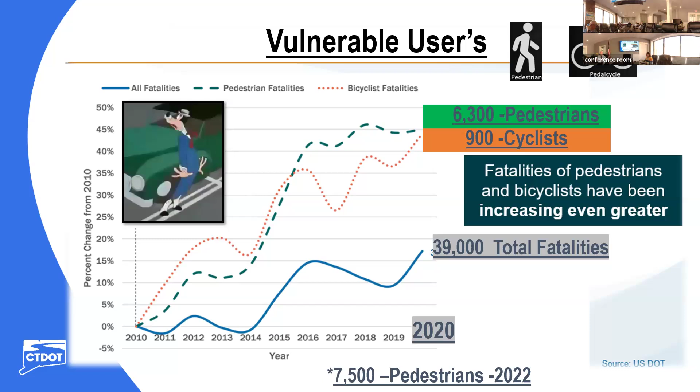6,300 pedestrians are killed annually, 900 cyclists, and in 2022 it was up to 7,500. The trend here is progressing significantly higher at a very fast pace, and the reason is speed. Speed is the reason we're having so many fatalities. In Connecticut, over 300 fatalities a year on our roadway systems, been averaging recently.

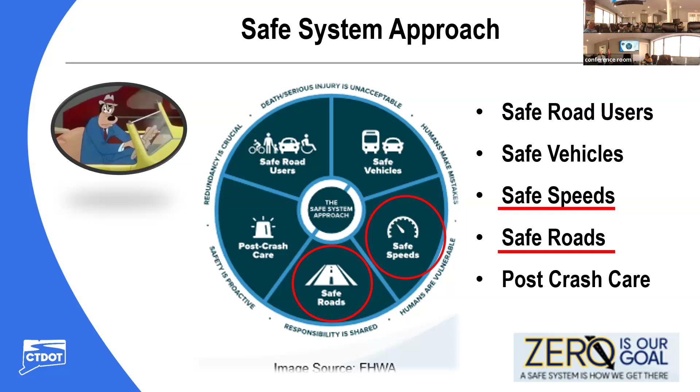Federal Highway has something called Safe System Approach. It's a 5-tiered wheel, and as transportation professionals, the ones that we focus on the most are safe speeds and safe roads. Those are the ones that we can have the most influence on. We can also look at safe road users through education, but we're primarily safe roads and safe speeds in that mission. And roundabouts are a tool to get us where we want to be. So we'll take a look at that.

But after about 3 months, the community understood the purpose of the roundabout, how it worked, and this really wasn't the trend anymore. But when it first opened, there was enough misunderstanding of how it worked that this was the attitude locally for a few days. And we saw that repeated in West Hartford recently.

So make sure that you educate your community, your team that you want to think about, your municipal leaders, especially emergency services. You cannot have a successful roundabout project if you don't have the police chief behind you and the fire chief. Very important. Public works for maintenance purposes, and your business owners. We don't always think of them as part of the team, but they're the ones that are working with the community. They engage the community the most. So if they're positive about some change in the community, they could spread that through their business interactions. Make sure you engage them.

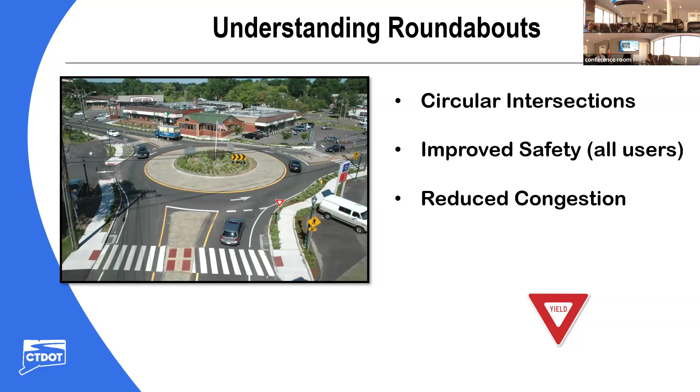Roundabouts are circular intersections that improve safety for all users. They reduce traffic congestion. Slower speeds, 15 to 25 miles an hour. There's no left turns at roundabouts, fewer decisions to make. You have less conflict points, less pollution. That's what makes them so good.

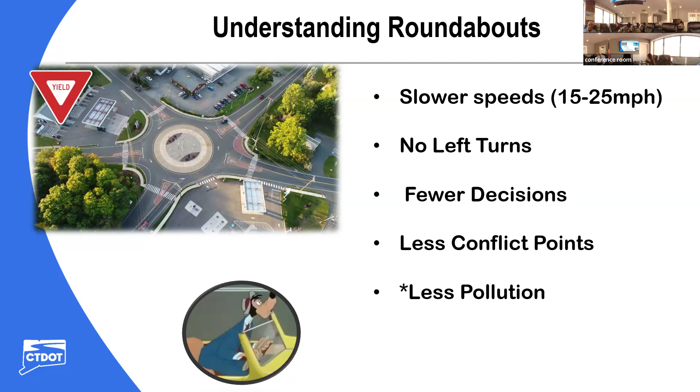When you compare roundabouts to traffic signals, signals tend to create more crashes. You have the signal going red, people are inattentive, they're not paying attention, you end up with rear end crashes. People get in a rush, they try to beat the light, maybe they make a left on red trying to clear the intersection, you end up with these angle crashes. And most of all, the signals don't address high speeds.

I have a lot of people from the community meetings that come to me and say, Scott, why don't you just put in a traffic light, it'll solve the problem. Well, the light is green and it doesn't address speed. So your pedestrians are still crossing at higher speeds. And if there is a crash, it happens at a higher speed. The signals also tend to be a lot less efficient in the off-peak hours because time is assigned around the intersection at certain phases. And it's very limited as to who can access the intersection at one time.

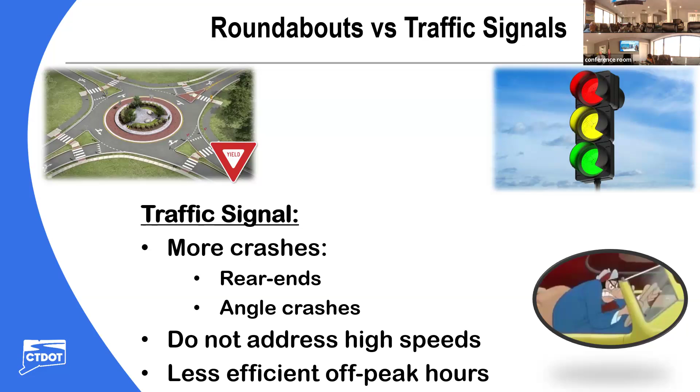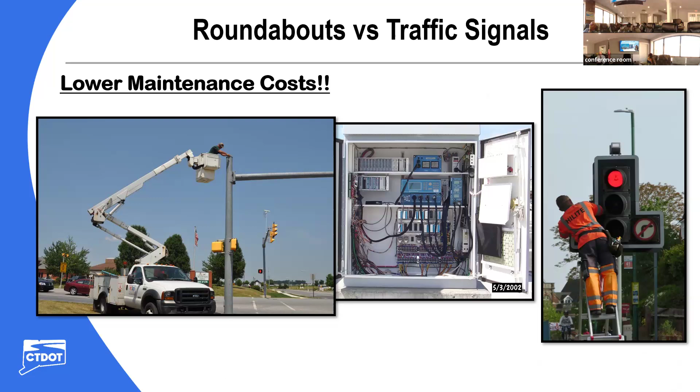When you start thinking about maintenance costs and we look at electrical systems and computer systems with signals, these have to be replaced every 15 to 25 years. These are an inherent maintenance liability that are very, very expensive that you don't have with a roundabout. So there's a lot of benefits to roundabouts.

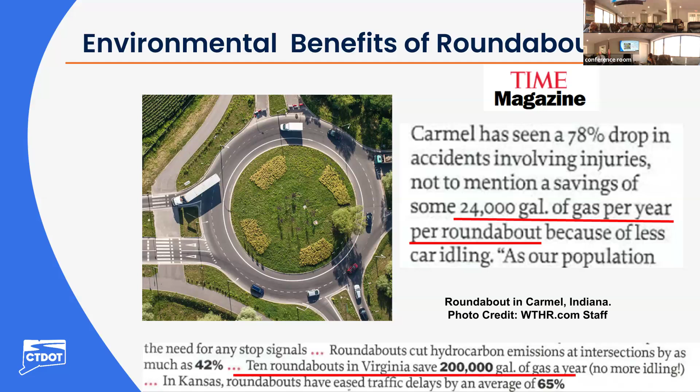When you look at the environment, 24,000 gallons of gasoline was saved in Indiana, and in Virginia, 10 roundabouts saved 200,000 gallons of gasoline in their community. So certainly a big environmental benefit from that. And in terms of operation too, and not having emissions from these vehicles, the roundabouts tend to be much, much more efficient, especially in the off-peak hours.

Now, the trend in roundabouts has been progressing significantly. They really got started in the US sometime around 2000. That's really when they first started coming out. Connecticut DOT got involved about 2005. We built our first roundabout maybe around 2007 or 8. But we've got over 10,000. I think it might be up to 11,000 now in the US. But the Northeast predominantly is where most of them are, except for California and Florida.

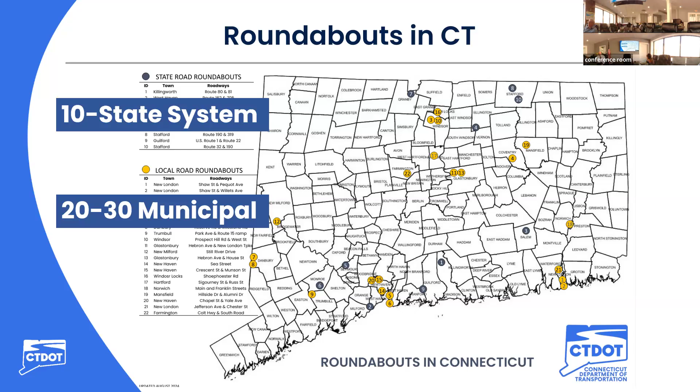We now have 10 on the state system. I'm estimating about 30 on the municipal roadways. This map is not 100% accurate because we don't have the best reporting system. It's really word of mouth, and if people let us know, we throw it on the map. I know there's one in Stamford that just opened that's not here. The one in Naugatuck is not here. And the one on the state system in Haddam we just finished last month needs to be added, but you get the general idea.

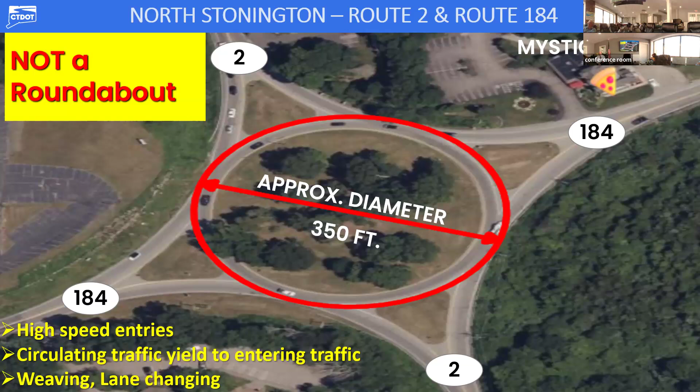So comparing roundabouts to old rotaries or traffic circles, this is not a roundabout. We have senior folks that refer to these as roundabouts from time to time, but this is not a roundabout. This is a traffic circle. And the difference is high-speed entries, and circulating traffic, when these were initially built, had the right of way, right? So circulating traffic would initially yield to entering traffic. That was subsequently changed. The yield was put on the approach due to crashes, but you get a lot of weaving, lane changes. The worst with these are the higher speeds.

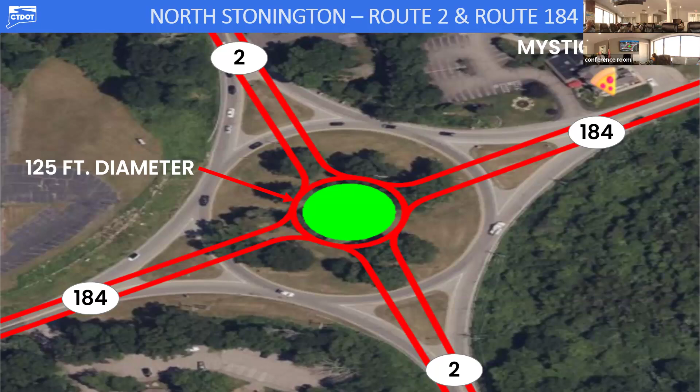This is what a modern roundabout would look like at that intersection. And this is in Connecticut. This is North Stonington on Route 2, still there, but if that was converted to a modern roundabout, that's what that would look like. And the speeds would be substantially slower for improved safety. Modern roundabout features, we have the truck apron, which is very important. That's what the rear wheels of the truck go up on.

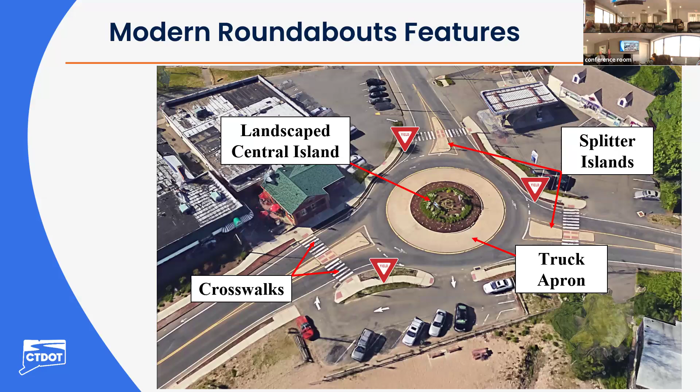We have splitter islands on the raised approach. We have crosswalks. We have yield signs. Very important features in a roundabout. In practice, you can see the truck apron here. That's what the rear wheels on a tractor trailer ride up on as they go around it. That allows us to keep the circular roadway narrow for motor vehicles.

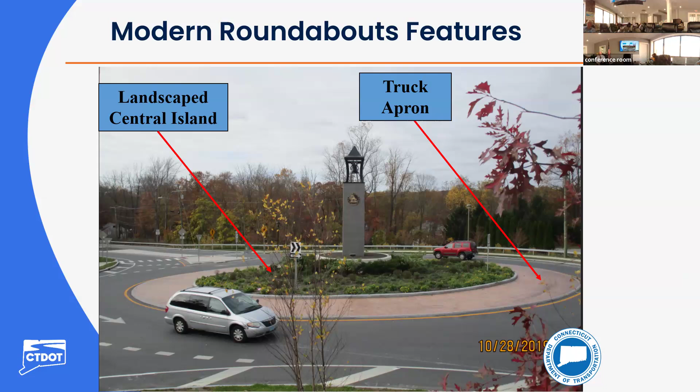The landscape island, you can see here, a lot of folks call that aesthetic, right? And plantings, but to me, that's safety. You can see that from a distance. You can see things with vertical objects from a distance, and that helps with the traffic calming. So I strongly recommend the landscape features.

Our design manual is NCHRP 1043. This is the third manual on roundabouts to come out in about 20 years. And the sense there is we're constantly learning, we're growing knowledge, we're progressing, especially when it comes to multi-lane roundabouts. So we try something and we learn from it, and then we revise the manual based on what we've learned. And that's going to continue for some time, especially in multi-lane roundabouts.

Now, some things to really look at if you're doing a roundabout review, maybe concept work, is alignments. This is one of the most critical roundabout design features in terms of overall safety. So if you have left aligned, that means the roadway coming into the roundabout is to the left of the center of the circle. And that gives you the best deflection, the best speed control coming in.

You can use center aligned, where the center of the roadway matches up with the center of the roundabout. Generally, it's a larger diameter roundabout. It requires more real estate because the diameter of the roundabout has to be bigger to get your overall deflection. What you absolutely don't want is right aligned. That means your approach roadway lines up with the right side of the roundabout, and you're going to have very, very high speeds. This is a fatal error in roundabout design.

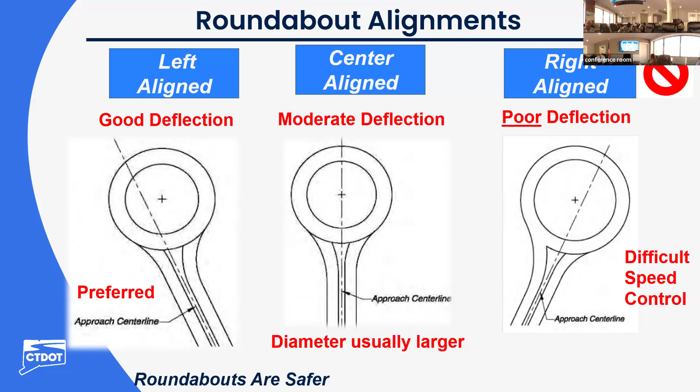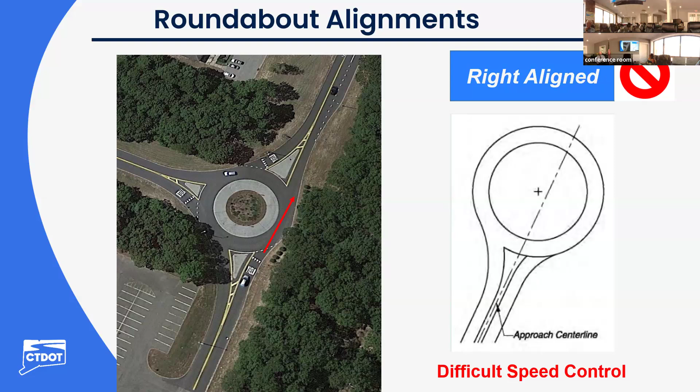And here's what that looks like in practice. So here's an example of that in practice. On paper, it may have not been noticed, but as that's built, we're going to get pretty high speeds through that intersection, right? So that's what's to be avoided. And I think it's pretty clear the goal that we're looking for here is speed control for safety. And we're just not going to achieve that with a right aligned roundabout.

Roundabouts have reduced conflict points over traffic signals or stop controlled intersections. Roundabouts have 8 conflict points because it's right in, right out. There's no left turns. When you look at a traffic signal or stop controlled intersection, there are 32 conflict points. Those are areas where you have vehicle path overlap. It's predominantly related to vehicles making left turns. Left turns from all these roadways cross other paths, and they're crossing in front of vehicles at extremely high speeds. And that's where your crashes become severe and you have injury crashes.

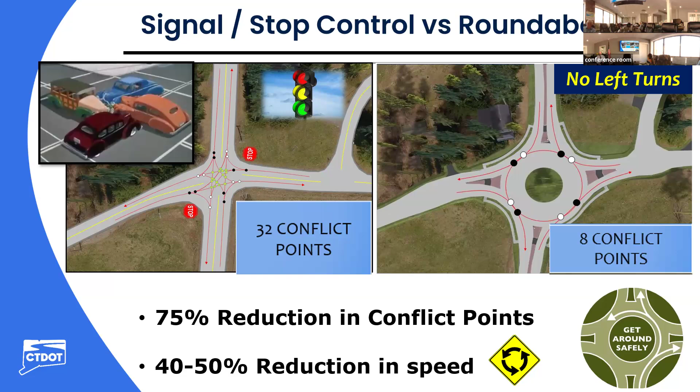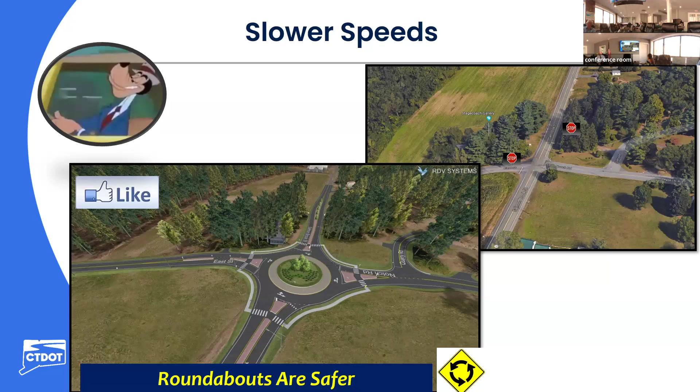So 75% reduction in going to a roundabout, often 40 to 50% reduction in speed can be achieved when you go to a roundabout. And looking at this example, this is in Granby, Connecticut. Looking at the roundabout compared to the conventional intersection, it's very clear which one's going to be safer just because of the geometry. You've got that high-speed rural arterial, likely speeds over 50 miles an hour on that. With the roundabout, you're going to be 15 to 25 miles an hour. And that's where we want our communities to be, safe.

Here's the speed reduction coming into the roundabout. This is my preference on design. It's a chicane type design, kind of forces a little bit of curvature on the approach to the roundabout. But if you look ahead, the driver's view of the roadway is cut off. It's cut off by the chicane and it's cut off by the central island of the roundabout. You don't have that appearance that the road just goes straight through. And that's what promotes traffic calming, gets people to slow down.

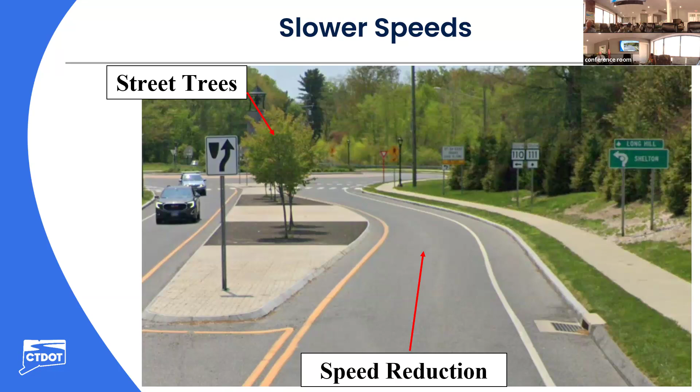I also like the street trees. I think they're an important safety component. It's not just aesthetic. That limits the visual corridor that the driver's looking in, and it tends to promote traffic calming. So love street trees.

Yield on entry. What's important here, double yield signs on the entry. Right and left yield signs. The one on the left is optional, per the MUTCD. Strongly recommend doubling up the yield signs. Works very well.

Landscaped islands and gateway opportunities, I strongly recommend them. I like flagpoles, municipal gateway signing, tall landscaping, not large caliber trees, but tall landscaping, especially because of its visual strength. People see that from a distance as they're approaching the intersection, and they slow down.

That's something that gives us the traffic calming that we're looking for, reduce speeds. But something very critical in this as a design feature, not an aesthetic feature: whatever you put in the central island, take the time and the expense to put lighting on it. Ground mounted up lighting is what you want.

Now, the conventional intersection, as you're approaching, if there's a traffic signal, you're going to see the signal, red, yellow, green. You'll see that at nighttime. Roundabouts are dark. You don't have the signal heads. So give that driver something to show them that the roundabout's ahead. And by illuminating your landscaping, by illuminating your municipal gateway signs, they can see that. And it's very helpful. Let me go back one slide. Okay.

One of our first roundabouts in Connecticut, this was Killingworth, 80/81. This was a retrofit. So this was an old traffic circle, kind of the low-hanging fruit, low expense, very high speeds through here. You're probably getting 40, 45 miles an hour. So we did a retrofit on that with moderate roundabout features. We get speeds down maybe 20, 25 miles an hour. That was a big success in terms of safety and operation.

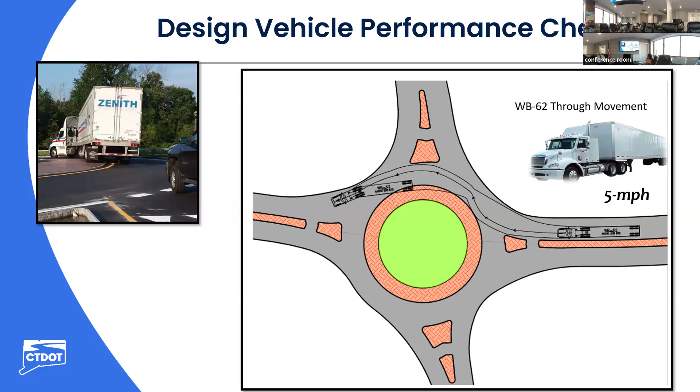And this is how we design for that truck. We use AutoTURN performance software with our CAD. And if you look at this, you can see the rear wheels of the truck are on the apron. The cab of the truck is on the circular roadway, lines up with that picture to the left. That's how that works. Cab of the truck never goes on this truck apron. That's a poor design right there. Cab of the truck should be designed to go on the circular roadway. Only freight goes on the truck apron, never passengers.

And here's how that looks in practice. You've got that tractor trailer going around, the rear wheels are on the truck apron, the cab of the truck is on the circular roadway, exactly how it should be.

And this is what happens, folks, if you don't properly design for that vehicle, right? The failure to the left side of the picture, we cheated the buffer. We didn't have a lot of space. It was a downtown commercial area. We went with a 2-foot buffer instead of, we typically do 4 feet between the curb and the sidewalk. And we put the yield signs in there, and the mirrors on the truck overhang the curb.

So when that truck is going through that curvilinear geometry and the mirrors are overhanging the curb, the mirror's taking out the yield sign. So you really need a 4-foot buffer to do that properly. And then we cheated on the center island. We didn't really accommodate the 62 properly. This first one was designed for a WB50 prior to the 62 design vehicle becoming the state norm with a permit. But this is what happens, type of damage.

And my point in showing this slide is that a 6-inch curb is not a deterrent to a driver of a WB62. That's a bump for them. And if they get in there and they get hung up, they're probably not going to back up gently and try to get out of it. They drop a gear and hit the gas. And this is what's going to happen.

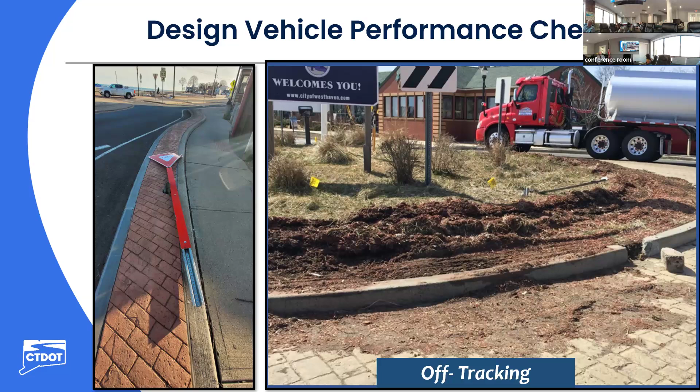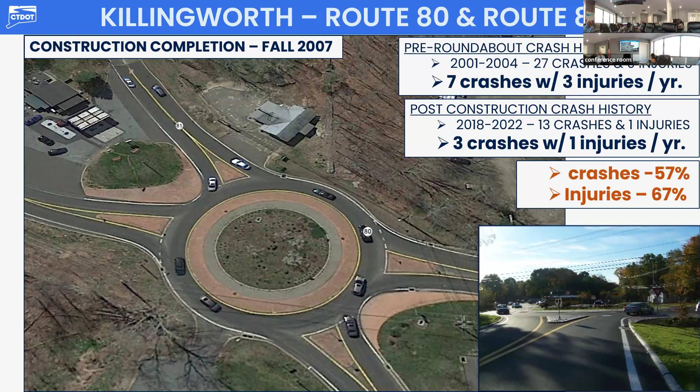Now, this location here came to me as a traffic signal request years ago. And we just knew for safety, because of the geometry there, fairly high speeds, the alignment of the intersection, the crosswalk especially concerned me with the length of crossing for our vulnerable users. The roundabout was the right choice here over a signal.

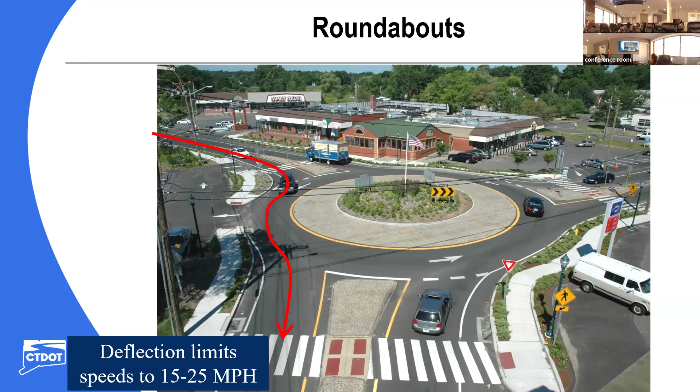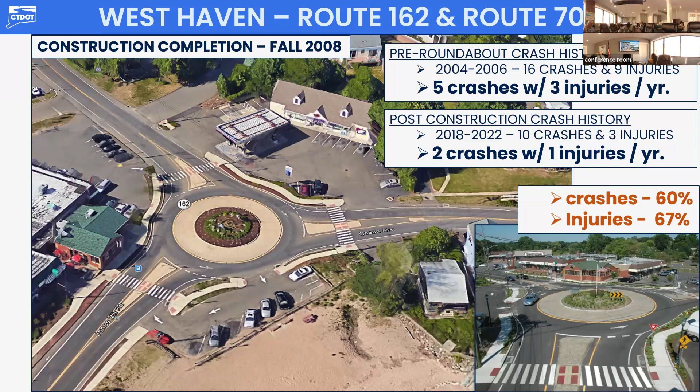We got deflection, we reduced speeds down to 15 to 25 miles an hour, and we got good pedestrian infrastructure. That's our goal. That's what we want. Significantly better choice than a traffic signal for that intersection. It works great. Reduced crashes, reduced injuries 67%. Good safety success with that one.

Now, when we think about our pedestrians in terms of safety, if you have a pedestrian get hit at speeds around 20 miles an hour, 9 out of 10 survive. Once you go into 40 miles an hour, those are our signalized intersections, a lot of them. Only 1 out of 10 pedestrians will survive a vehicle strike at 40 miles an hour. So we could save lives by implementing roundabouts and keeping that speed down in the 15 to 25 mile an hour range, especially.

Those are my preference. For cyclists, what I absolutely do not want to do is build a cycle track around the perimeter of the roundabout, because now you're putting bicycles in front of vehicles that are exiting to the right. And in the Netherlands, it's been a conflict. In other areas it's been tried. So either encourage people to ride with traffic in the circular roadway or exit the roadway onto a side path or a sidewalk.

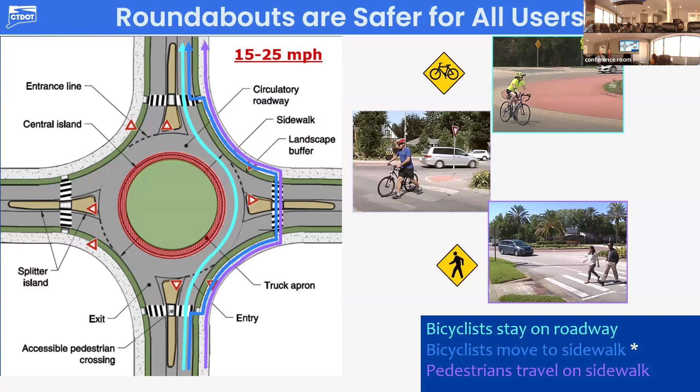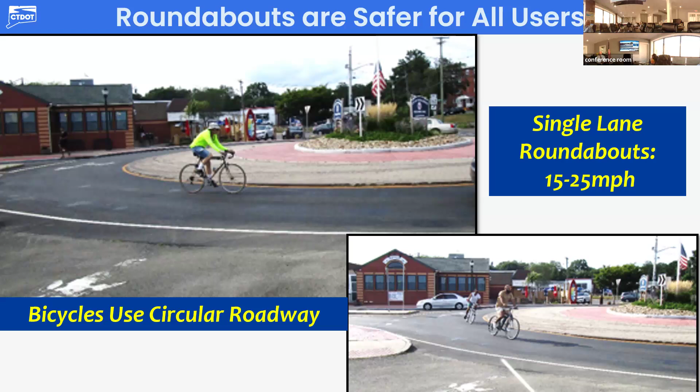Here's that cyclist. This is on our West Haven roundabout, riding with traffic, no problem. Very easily and safely get through that intersection. And what I like seeing about this is they're not riding in front of vehicles. They're never crossing in front of a vehicle entering the roundabout. They're not crossing in front of a vehicle exiting the roundabout. That's the safest place for a cyclist to be.

Now, another thing about roundabouts in terms of pedestrian safety that's very different than other intersections. At a conventional intersection, whether it's stop controlled or signal, the crosswalk is in front of the vehicle. It's in front of that operator that's making complex decisions. They're looking at the traffic light, trying to determine if it's green, can they go? They're looking at other vehicles approaching the stop sign. When is it my turn to go? There's a lot of data they're processing.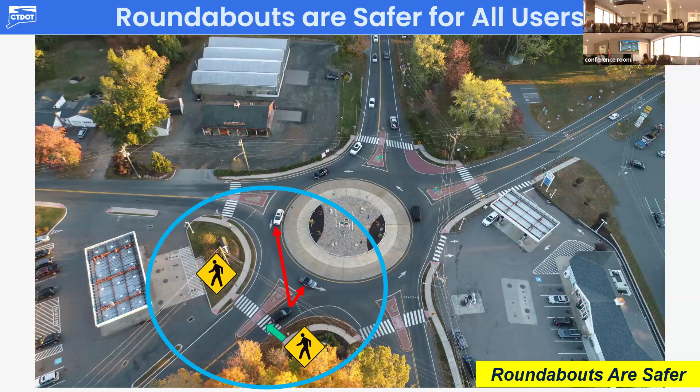What they're not doing is looking to their right to see if a pedestrian might step off the crosswalk at a point which they hit the gas and go. And you don't have those types of opportunities for conflict with a roundabout, because the pedestrian crossing is behind the lead vehicle. So that vehicle that's going to enter the roundabout, he's processing information, he's yielding to those vehicles on the circular roadway and he's getting ready to enter the roundabout. He's not concerned about pedestrians. The pedestrian's always behind the operators making the decision, making pedestrian safety at roundabouts substantially safer than any other type of intersection.

And here's how that works. You're crossing behind the lead vehicle making the decision. It's a two-stage crossing. You look to your left. If you got a gap, you go out to the refuge island. You look to your right. If you got a gap, you cross the rest of the way. These are short crossings. Always illuminate your pedestrian crossing.

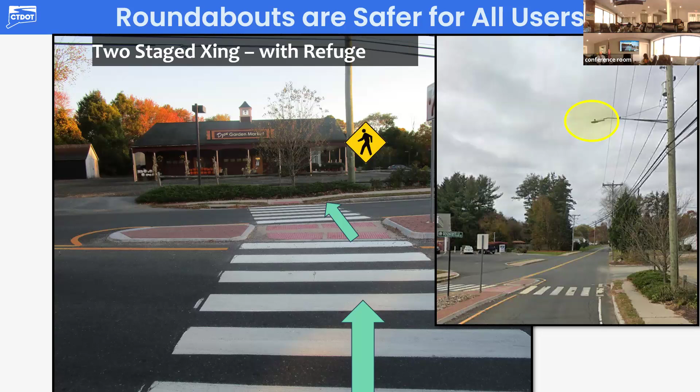To the right here, I have a picture of illumination. That's front lit. That means the light goes in front of the crosswalk. If you put it on the back of the crosswalk, it creates shadows. So always front light your pedestrian crossings, very critical. Illumination is a very, very important part of roundabout design. It has to be done. It's not an option. It must be done. You have to have good illumination.

Now, if there's one takeaway from today's talk that's the most important to me, it's sidewalks. Always build sidewalks at roundabouts. We never want to be in a situation where we said, oh, nobody walks up there. There's no destinations. There's no people walking. There's no pedestrians. At some point, there's going to be a pedestrian there, whether it's somebody jogging, somebody's car broke down, there's going to be a pedestrian.

In this case, I spent a lot of time in this location early on. In the early 2000s, there were no pedestrians, right? There were really no destinations. And then I went out there after we built the project. It was a half day of school, and I see kids walking to the convenience stores to get ice creams and sodas. Good. And there's no sidewalks. So if you look at that truck in the roundabout, where's the front bumper of that truck? It's almost overhanging the curb line.

Roundabouts don't have shoulders. So that painted line, it's a visual aid. It's a white edge line. It has the glass beads. It reflects at nighttime. It helps guide the driver. It's not a shoulder like a conventional intersection. It does not have a safe space for pedestrians.

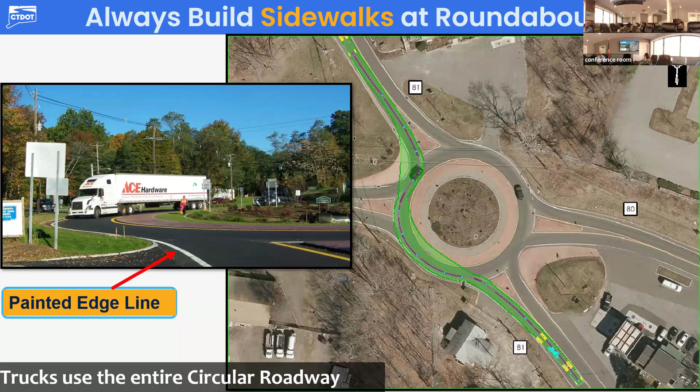So if any of us in the room or on the call were at this location and we were pedestrians and we're going to cross this intersection, where would we logically go? We're going to go to the truck apron and we're going to kind of skirt across the roundabout. I did it when it was built. We would all do the same thing. It's human nature. And that is not where we want our pedestrians, because that's what's going to happen, right? And that's not where we want our children. So build sidewalks at roundabouts. Always build sidewalks at roundabouts.

Five Corners, Ellington, Connecticut. This was a 5-leg stop controlled intersection, and all-way stops are usually huge success rates for roundabouts. This one had terrible traffic congestion delay. It took 4 minutes to get through that intersection, just because of the delay involved with decision making with the 5 stop signs. Built the roundabout, got nice gateway features, worked very, very well. And overall, the traffic went away. People were initially saying traffic was avoiding the area. It's not the case. It's just that the roundabout worked so much better.

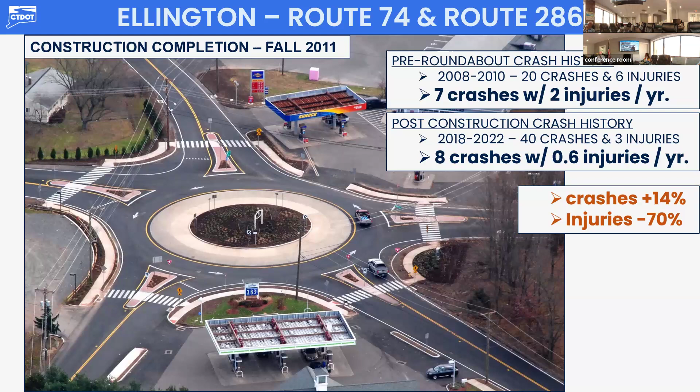We reduced injuries by 70%. Crashes went up a little bit at this one for this data range. And that changes. The prior data range I had, they went down, but this one they went up 14%. But the benefit here is nobody's getting hurt, right? We reduced injuries by 70%, and it's still a safety success. So that was a huge improvement in terms of traffic operation and safety.

This is one of my favorite roundabouts and one of our biggest successes. This one's in Salem, Connecticut, and this is typical for Connecticut, a rural arterial roadway. This intersection's been built out over the years.

You got turning lanes all the way around, high-speed tangent approaches. You know, you can imagine we're going to have some safety concerns here. And in the peak hour, trying to get through here was kind of the Wild West. There wasn't enough time for every phase. People were making a left turn on the red, trying to fight their way through the intersection. This is what it looked like. I took this picture at 5 o'clock. And certainly safety concerns we have there in terms of how that works.

Go to the modern roundabout, the speeds are low, right? 15 to 25 miles an hour. But you'll always notice here, we have concurrent vehicle entry. Multiple vehicles are entering the intersection at the same time, which you wouldn't have with a traffic signal. And that's why the roundabouts work so much better in terms of operation, in addition to safety. That's just wonderful how well the intersection works.

Here comes a large truck. So anyone that might say trucks can't fit through roundabouts, absolutely they can, if properly designed. This one's actually a permit vehicle. That's an oversized load. The trailer's up on the truck apron, right where it should be. The cab of the truck's on the circular roadway. That's designed very well. And that's exactly how a truck should use a roundabout.

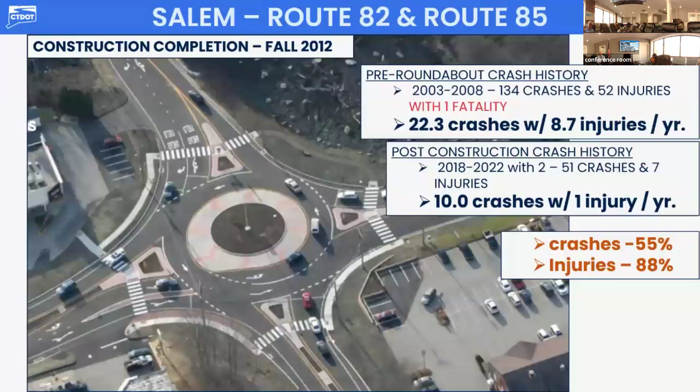Working wonderfully. Reduced injuries 88% at this location. And why that's such a big deal, the signalized intersection had 22 crashes a year with almost 9 injuries. Almost 9 people a year were probably going to the hospital at that intersection. We got that down to 1. That's lives saved. That's a big impact to that community. You know, that's somebody who went on with their life and didn't get hurt. Big deal.

Okay. Well, I'll hit questions at the end.

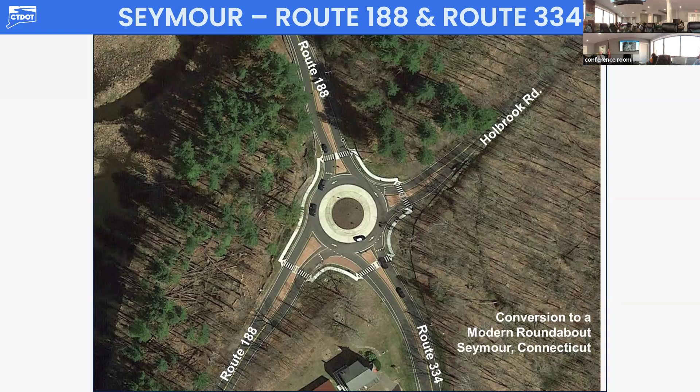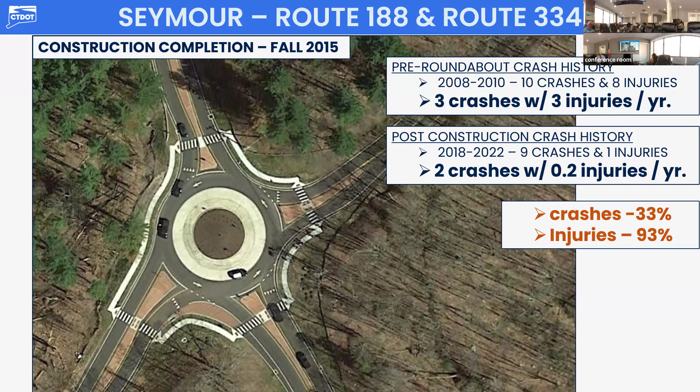I'm gonna pick up because I'm running out of time, but Seymour, Connecticut, old rotary, right? High speed possibilities through there. We go to the modern roundabout, much safer. We got pedestrian infrastructure there too. Just, you know, better intersection. If you look at this, you just can't go fast through this intersection. We're influencing driver behavior with the design of the roadway. And this is just the way to go. This was a huge success as well in terms of safety. Reduced injuries 93% at that location by upgrading that to modern roundabout features.

Monroe, Connecticut, Route 10, 111. This was side street stop controlled. Very high speeds, a lot of delay at the stop controlled intersection. The people pulling out at the stop sign on the leg with the stop, they just had a hard time judging gaps because of the approach speeds, and it resulted in a lot of traffic congestion. So we went to a modern roundabout at that location, a huge win for the community. You know, we reduced speed significantly. We got nice pedestrian infrastructure, and the delays completely went away at that intersection. That was a huge success.

In Connecticut, several of our roundabouts have had vehicles go through the center island. You know, you have people that are impaired, people that aren't paying attention, people that fall asleep. So whatever you put in the center island, be aware, it's possibly going to get hit at some point. You're going to have to replace it. So you don't want decorative statues or ornamental things.

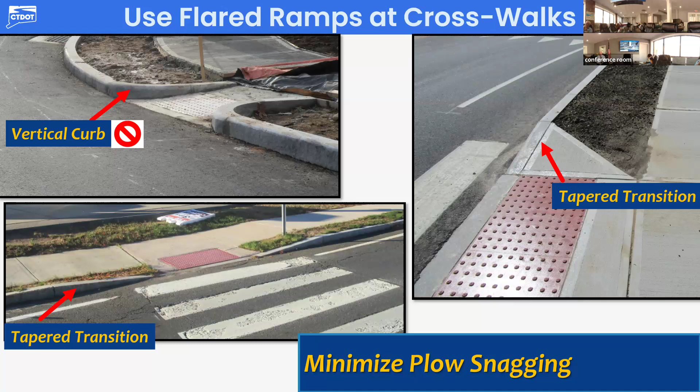When you use those on tangent roadways, it's not a concern. The plow just goes right by it. But on a curve, the plow is going to contact that vertical surface. You can bend the plow, you can bend the plow frame, you can injure the driver. So use the flare, the tapers, the plow just rides up them and bumps right off. And your public works folks will appreciate you.

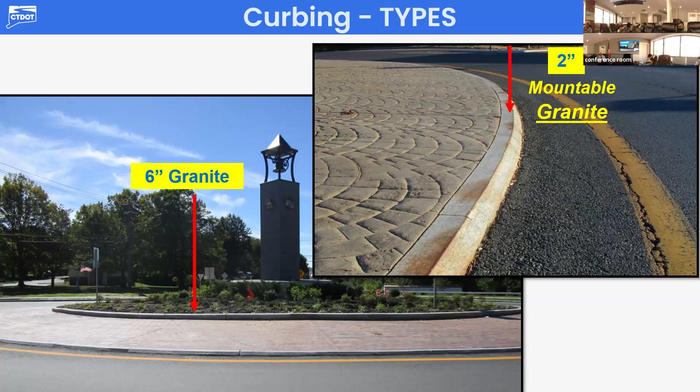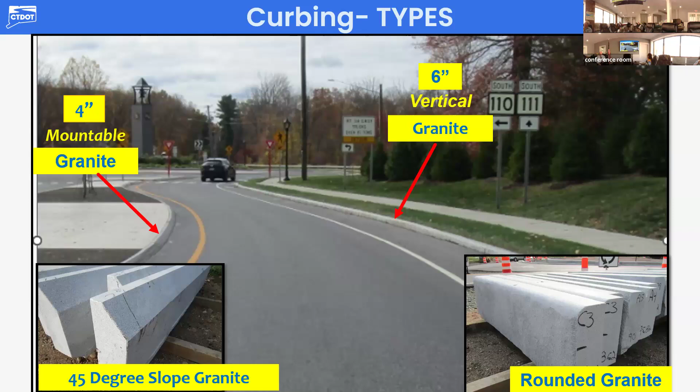On the truck apron, granite curbing, 2-inch elevation, mountable. On the back, I like 6-inch because it does deter trucks a little bit. On the left side on the approach, I like a 4-inch mountable curb. The reason for that is so emergency vehicles or tow trucks can mount the center island on the splitter as they're approaching. And if you have a crash on the approach, they can go on the opposite side and get into the roundabout and take care of business. The right side, I like a 6-inch curb because it helps with traffic calming and slowing vehicles.

Now, I recommend granite anywhere there's curvature. This is what happens when you build concrete curb at a roundabout. This curbing's been in maybe 2-3 years when I took this picture. It just does not hold up to plowing. The plows bump it, they ride against it. You don't get good strength out of concrete curbing poured in place in the field.

If you can get it precast, you'll have a decent product, but poured in place, first thing happens, that truck shows up at the job, the foreman's going like this, add water, they spin it, you just blew out the water cement ratio and weakened the mix. The next thing that happens is it doesn't get burlapped and wet, it doesn't get appropriate curing conditions. The strength on this curbing is not what we think it's gonna be per the specs, and that's what happens after you plow it a few years.

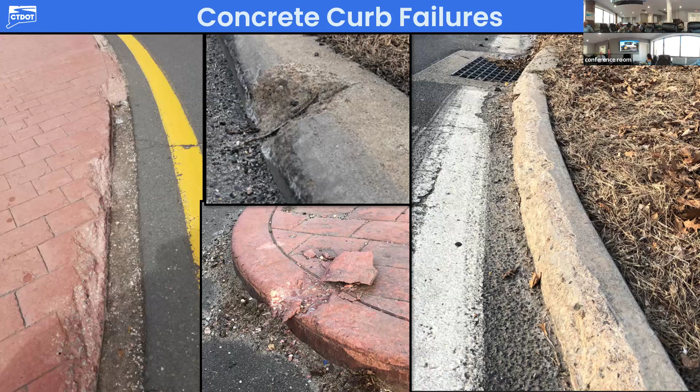If you start looking at lesser materials, just keep in mind when the truck goes through that roundabout, the rear wheels are not rolling. That tractor, the cab part of the truck, it kind of jerks and yanks those wheels to the side. They slide a little bit, and that's why there's tire tracks on that truck apron. That rubber is kind of getting angled a little bit. It's not a straight shot. So my point is there's a lot of stress on the truck apron as those trucks are navigating through it. And you want to use a very stout material to ensure you don't have to be back out there replacing it.

Stage construction plans are a must for roundabouts. Absolutely. You cannot put a job out to bid without figuring out how you're going to manage traffic and how you're going to stage it. Because that truck apron was for the rear wheels of the truck to get through. What happens when it's not there or the concrete is green and not suitable for traffic yet?

Well, that means you need a bigger area around the outer perimeter of the roundabout, which means you don't put the nose of splitter islands on till last. You don't build your sidewalk till last. Those are the last things to get done. So staging plans are critical to the success of a roundabout job or detour.

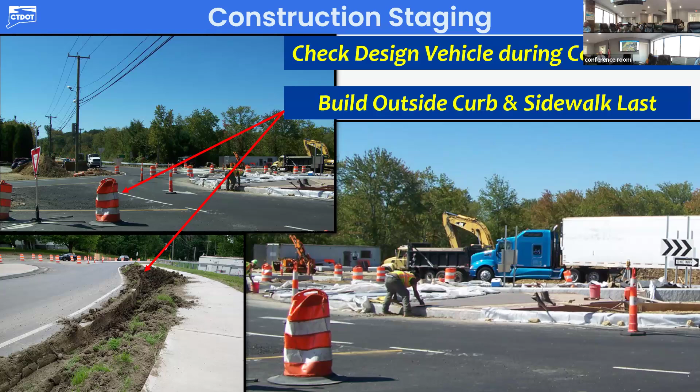Now, Granby, Connecticut, 202 Notch Road, high-speed rural arterial, side street stopped. Knew that was a great spot for a roundabout, showing how that would work. Obviously, you're going to have slower speeds with this type of intersection, and definitely a huge safety success there.

Here's the school bus. Stays off the truck apron, really critical for that design. Anything with passengers stays on the circular roadway. So for folks worried about children, and the bus, worked very, very well. Less conflict points, slower speeds, 78% reduction in injuries after we opened that one.

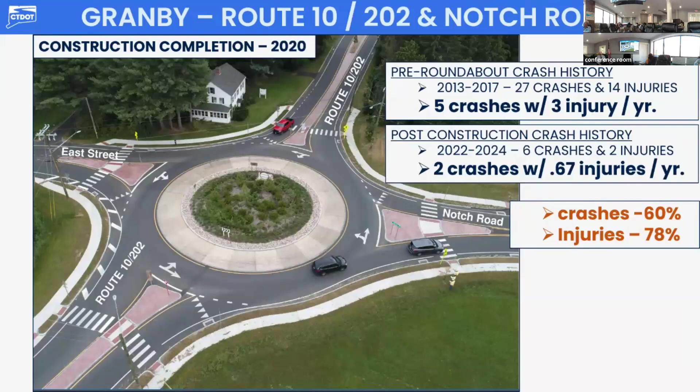Huge success. This is in Guilford, Connecticut, and this is a really awkward configured intersection, and that's where roundabouts really thrive, right? Very confusing intersection, high speeds. Put the roundabout in there. We know that's the right choice, the safer choice for sure, right? Look at that. I mean, that's how you want to go.

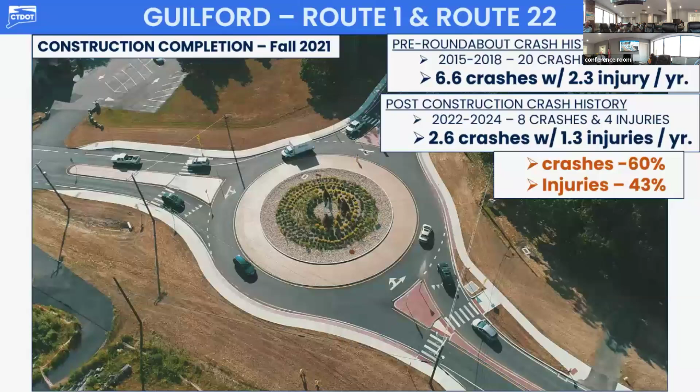Here's traffic going through there, concurrent movement on multiple legs. That's capacity, that's efficiency. You wouldn't get that with that prior intersection. So we know that's a success. 43% reduction in injury. That one's fairly new. I think we're going to have better success when I redo the crash data on there.

Now, if your roundabout gets to the point where you need to add additional lanes and one circulating lane or approach lane doesn't work, once you get to the point where you have 2 circulating lanes and 2 through approach lanes, stop. Think about what problem we're trying to solve. We don't want to put in roundabouts because we love roundabouts. We're putting them in to solve a specific problem.

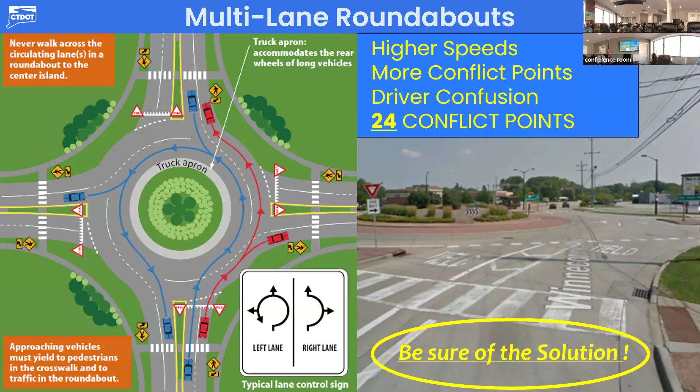Now, all the things we talked about with roundabouts and my message, right? Don't wing it. Close enough is not good enough with roundabout design. Pay attention to the small details because they matter. Here's one in California. We don't have double yield signs. We don't have vertical center island. We don't have splitter islands on the approach.

It's like a scene out of a movie, the Dukes of Hazzard. All the things that we talked about. The woman there drove straight into that roundabout. Definitely wouldn't. So my point is the details matter.

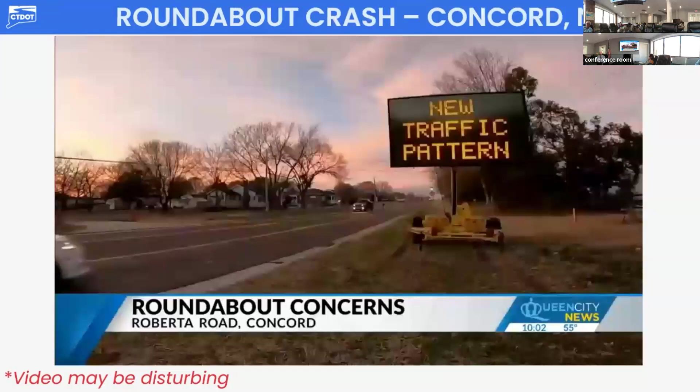They do. Here's another one, I think this is North Carolina, but just another example. Now hoping people slow down before; people can't see it coming up the hill either way. This is a mini. It's at the crest of a hill. You can't see it.

Become deadly. Well, it's just like I thought it would be. Twice, or even 3 times. And yes, it was captured on video. A few weeks ago, someone split a nearby telephone pole in 2. Main problem is the roundabout. All right, here. We move ahead.

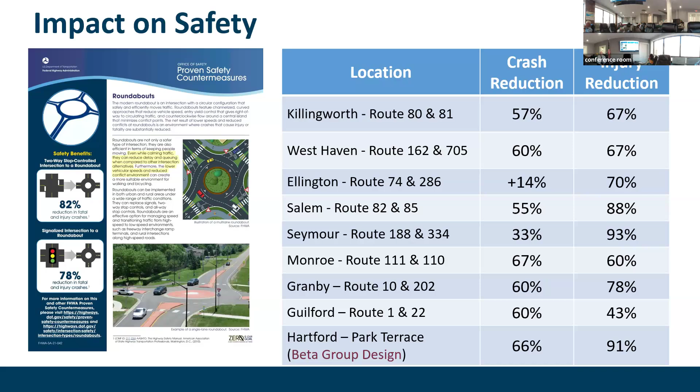Summarizing our success rate here in Connecticut, fantastic success in terms of injury reduction with our roundabouts. Every one has been a success. The one on the bottom was designed by Beta Group in Hartford. Fantastic success rate on that too. We're right in line with what Federal Highway is suggesting. And overall, we're reducing injuries by 71% and crashes by 47% with our roundabouts.

And remember Mr. Wheeler, right? He was our aggressive driver. He's going to split the lanes in the multi-lane roundabout. And Mr. Walker, he was our vulnerable user that we need to design for and think about. So, questions?

Well, just going back to what I was going to ask about the one in Salem. The one concern I have with you having the 2 lanes enter in 2 spots is, especially northbound on 85, they tend not to stop. They think they have a clear shot going through there. So I guess the question is, is that a less desirable solution for a roundabout? Like just keeping them 1 lane as opposed to having those multi-lane entries?

Absolutely. It's significantly more desirable than the traffic signal that was there. No, I won't doubt that. But yeah, our priority would be to just have a single lane approach. Yeah. Always a single lane approach. And the design practice, we usually design for 20 years in the future, projected volumes. So we try to get it to work for 20 years in the future.

On roundabout design, it's often recommended you might look 10 years in the future with an option to build the additional lane in the future if you actually need it. So when it comes to turning lanes or additional lanes, if you can get by 10 years post-construction with a single lane on the approach, strongly consider it. And then accommodate in your constructability future expansion, if possible. Because the more lanes you add, the drivers tend to split the lane lines and the speeds go up.